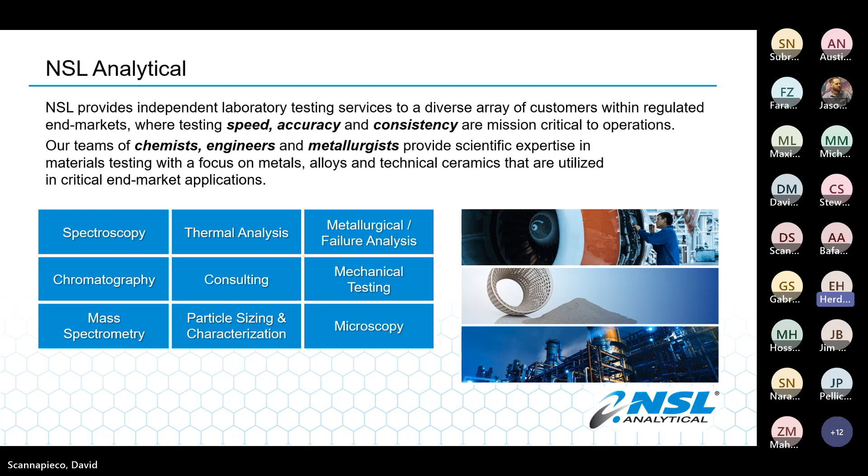A high-level outline: I'm going to kick us off by talking about Moore's Law, the exponential technology development curve Gordon Moore coined in 1965 for semiconductors, and draw analogies to our current state of development in metal additive manufacturing. Then I'll turn it over to David, who'll talk about the current state of industrial metal testing for additive manufacturing. Calvin will cover the third section on his research at Ohio State in the Materials at Extremes MatX lab. Then I'll close with an overview slide to seed discussion: what do we need to keep developing new materials for additive manufacturing?

Next slide, please. So again, I just have three slides here. I'll turn it over to David then.

I mentioned Moore's Law. This is the curve from Gordon Moore's original article published in 1965, cramming more components onto integrated circuits. Moore's Law says a doubling of the number of transistors every two years, so in powers of ten that's about a tenfold improvement every seven years. A lot of our modern life has been driven by Moore's Law.

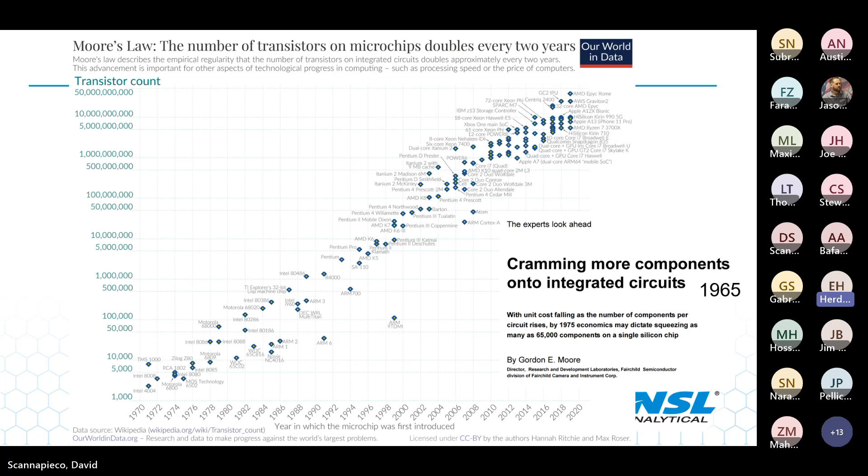There are a lot of different elements to this. I'll highlight three here and a fourth on the next slide. I think this is the foundation by which we're seeing new applications come out in metal printing, moving from prototyping to production. The first, an interesting corollary to Moore's Law, is that the cost of metal printing is coming way, way down. I've highlighted Xact Metal, a collaborator of mine for many years. Now they have, in this very cost-effective segment of laser powder bed fusion, a nice set of equipment they're selling that's in the low six figures—an interesting new dimension to the market that didn't exist previously.

Another development driving a lot of progress is advancing wire-based printing. I have an image there from Lincoln Electric Additive Solutions here in the greater Cleveland area. They're on the end of the spectrum in terms of very, very high productivity—measuring their productivity in pounds per hour, and their parts not just in centimeters, but in meters cubed. A really exciting entrant into the metal printing space.

And then another one would be binder jetting—so three different modalities here on this page. Binder jetting is really developing a niche on the metal side in high volume production because of its ability to scale with MIM processing. Next slide, please.

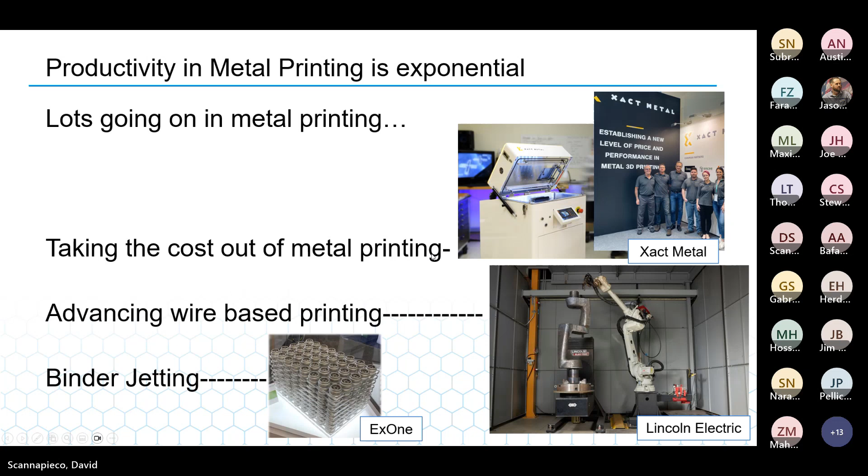What I did on this slide is chart, at a high level—happy to talk about more data offline—a snapshot historical view of productivity in centimeters cubed per hour for laser powder bed fusion of metals. What's really exciting about mapping this curve is that we, as a community, have gone through a 10,000-fold improvement over roughly 30 years. At least for this chart, and I think if we chart the cost and the productivity for wire-based and binder jetting as well, we are tracking Moore's Law for metal printing, which is really, really exciting.

I'll highlight here the three chapters I've broken out: the early metal printing feasibility era—low power lasers, low density, very low productivity, less than one centimeter cubed per hour, maybe just a few per day—up to the first laser powder bed machines that weren't doing fully dense metal. Then in 2004, fiber lasers came out, 200-watt fiber lasers integrated into these machines, and companies were first able to demonstrate fully dense metal with a single Gaussian laser. That was perfected, and there have been a lot of interesting developments and TRL/MRL maturation for parts. Then I have a demarcation line at about 2014, when a lot of the industrial multi-laser systems were introduced—that's the next star at 2014.

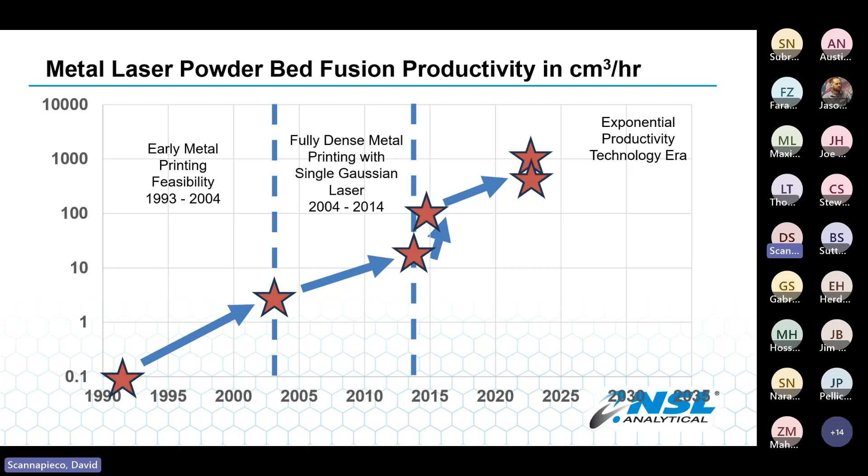Hi, my name is David Scannapieco. I am the Scientific Development Manager here at NSL. My expertise is in alloy development, so everything from atom to mechanical properties is what I study and where my interest lies.

When we look at additive manufacturing, there are quite a few unique situations and instances for this process that we need to characterize before we can get to a point of qualifying these for manufacturing, especially in the case of aerospace or space, where the needs are very precise.

NIST has identified three major challenges for approaching qualification of additive manufacturing. First is largely just the complexity of the parts, the freedom to design whatever we want in the additive space. It also introduces a challenge of how we can even test things like lattice structures, which you can see in the top right there, where the struts of that lattice are hundreds of microns, if that. Where can we get mechanical data that's reliable and can reproduce the performance of that part in its application?

Similarly, you get internal structures where you're going to get the as-built surface of additive manufacturing, which has a known severe impact on fatigue properties, stress rupture properties, etc. That's a major concern - how do we characterize those and approach qualifying them? Not to mention, reaching internal structures from an inspection point of view is a challenge.

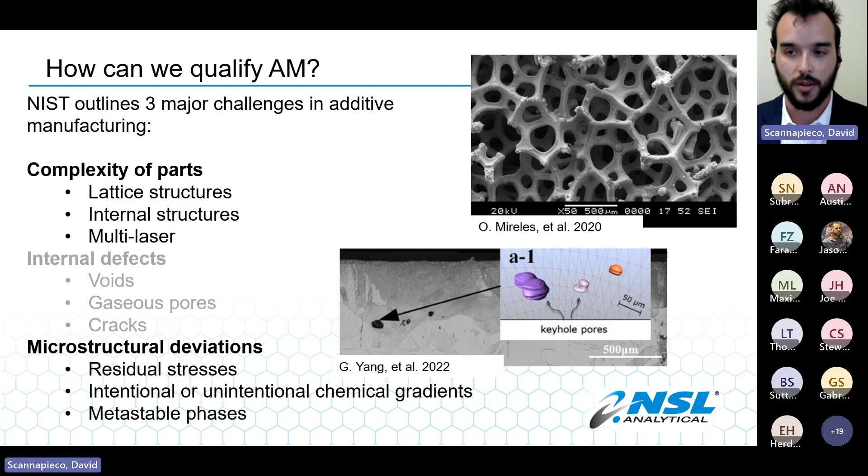So I'll step through a couple of solutions that exist in literature at the moment, but mostly this is to open up a conversation between testing labs, research groups, and manufacturers and industry, so that we can optimize the testing process to qualify AM parts. This is an ongoing conversation - there's no silver bullet here today.

But in some cases, we've found correlations between micro testing and typical ASTM standards. You can see great agreement in this miniature tensile test specimen here as compared to the round standard bar of 6 millimeters in diameter.

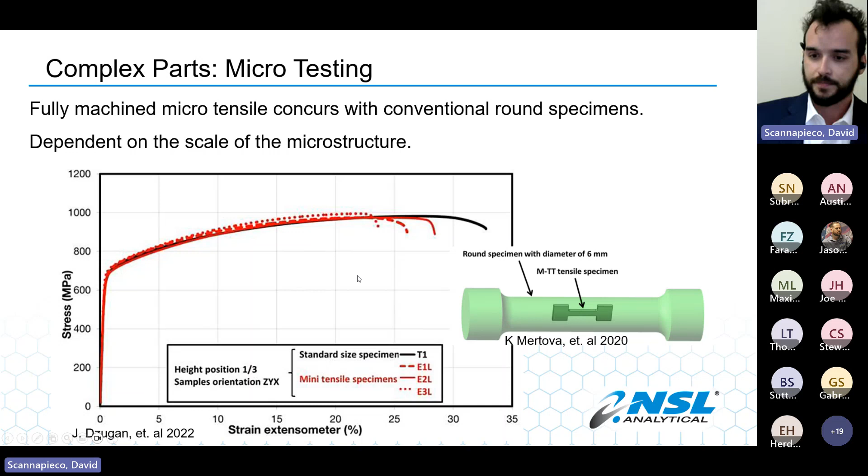And when we go forward with that, I can make this tiny specimen that I can carve out of a complex shape like this turbine in multiple different ways. We've got horizontal bars, vertical bars, coming right out of the fins, so we know the properties of the fins in the radial direction, which is exactly what the application is going to perform at.

And you can see, compared to two other literature sources that compare the Inconel 718 properties here, our miniature tensile specimens are performing on par, which is a great discovery, so we can look at complex shapes, but now we can test them even if they get very thin walled or very small component wise.

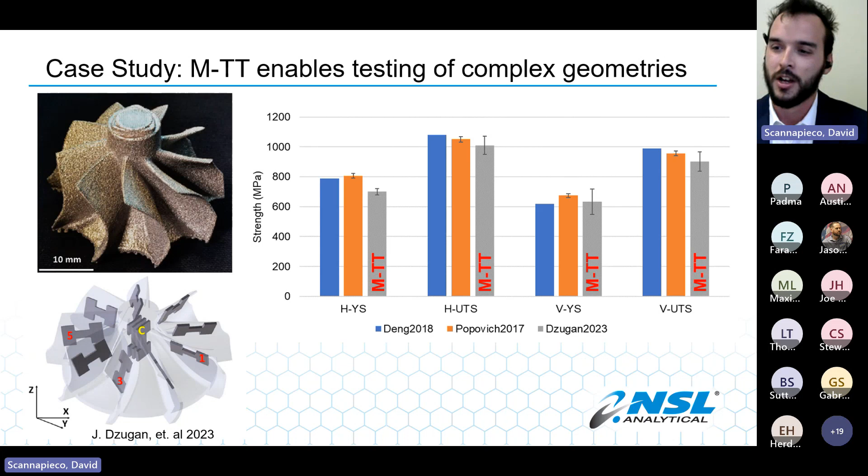When we look at getting into the microstructural deviations, I think the golden standard is always to go back to forging. You get a single heat of material, a largely homogeneous ingot of whatever material you're working with. It's forged and heat treated in groups together so that when you get to the end, the predictability between the microstructure of all those pieces is extremely accurate, extremely precise. So the testing requirements are not very severe, 1-2 components at most per batch, and that certifies tens to hundreds of parts depending on the quantity and the quality of the size.

So in additive manufacturing, how can we get to that level, and what are the challenges that we find when we're trying to approach this?

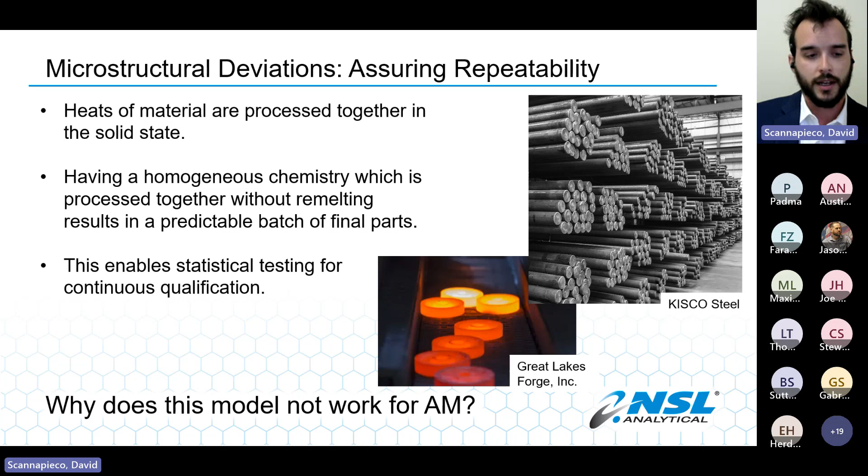So the key here, one of the major differences, is that obviously additive manufacturing is not a solid state process. In forging, you've cast your ingot of metal and then it never melts again until it's in application, and hopefully never melts in application either. But in additive manufacturing, we're remelting several times within the process.

And yes, we're working in an inert atmosphere, but even at 0.1% oxygen partial pressure in the chamber, which is where a lot of additive manufacturing machines will start printing at, you end up with oxides in the material because liquid metal loves oxygen. And even worse, in some cases, the unintentional chemical gradient, we superheat the metal, so it's not just getting it into a molten state, but superheating it, and in many cases vaporizing it. You see that on the inside of additive manufacturing machines, you get coats of whatever metal you're working with on an atomistic level, but it does exist.

And that can make some uncertain chemical changes from our powder stock to our final product. Understanding all of these changes and how adjustments of the additive manufacturing parameters play into these cases needs to be well understood. In addition, when you're building your component, your grain size changes from the bottom to the top of the build.

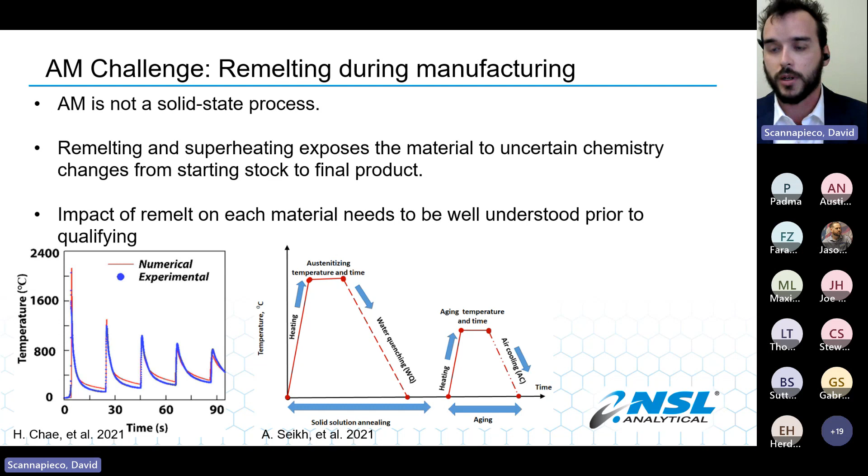Yep, and here we go. How do we test those batch sizes? Do we need witness samples in every single build, which is a practical approach to the task at hand?

But at the same time, if you're only building a handful of parts, depending on the size of the build and the size of the part and the optimization of the packing of those parts, you could be looking at several-fold increase in testing requirements to certify the same number of components as, again, the golden standard of forging.

And so somehow identifying where the critical points of failure in each build setup could help us reduce the amount of testing significantly, so that we can qualify these builds in a more effective manner.

It needs to be a conversation between test houses like NSL, research groups like Calvin Stewart at UTEP, and the manufacturers, to make sure that we're hitting everything we need to do to qualify these materials and advance out of the manufacturing into the industrial space.

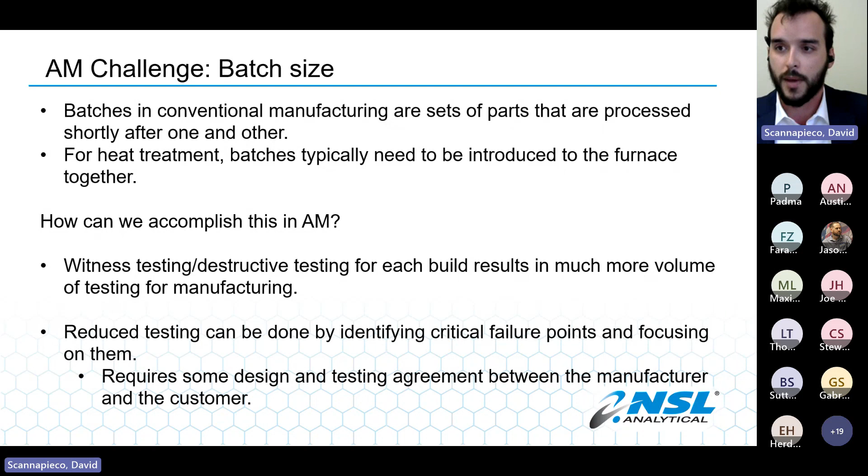And finally, one of the major differences for additive manufacturing is your feedstock characterization. You have powders, not ingots. Surface area is much higher, much easier to collect oxygen and expire the powder. It can go bad over time if it's not being used.

In addition, when you put the powder through a build, that chemical formula might change somewhat. And in those cases, we need to be able to certify that recycled powder is going to be as effective as virgin powder. So again, this is a question of do we need to chemical test after every build, or after every 5 builds or 10 builds?

And you can see where there's an exponential increase in chemical testing requirements, because not only do we have to certify batches coming out of powder manufacturers, but everyone in industry who's recycling powder is also sending for more chemical tests.

Every existing powder lot is getting chemical tested over and over again, and it's unwieldy if you just look 5 or 10 years into the future. So how these parameters all play together and what needs to be done in order to ensure that we're able to accurately make the parts that we need to is a major conversation that needs to occur and is occurring.

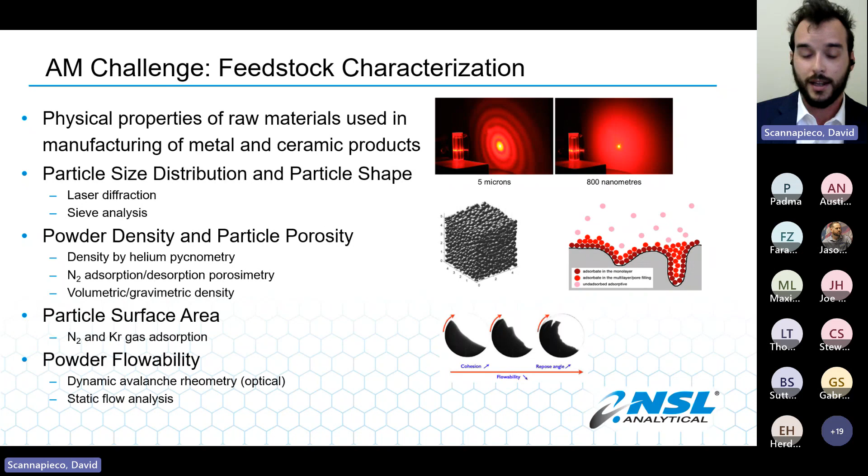So I talk about the importance of testing the chemical makeup of the powder to make sure that it can be reused in the right way. That's mostly because even trace impurities in powders can cause a significant change to the processing parameters.

So in this case, you have a 304 stainless steel, and with just an addition of 160 ppm of sulfur, you change the convexity of the liquid metal in the weld pool. That goes from being a deep penetrating weld, which is more ideal in an additive case, to a shallow wide weld, which reduces remelting and potentially prevents layers from fusing together. So now your powder might change how it's able to be processed without you changing parameters to compensate for it, and you end up with bad parts after some amount of time. Who knows how long it might take to absorb 160 ppm of sulfur.

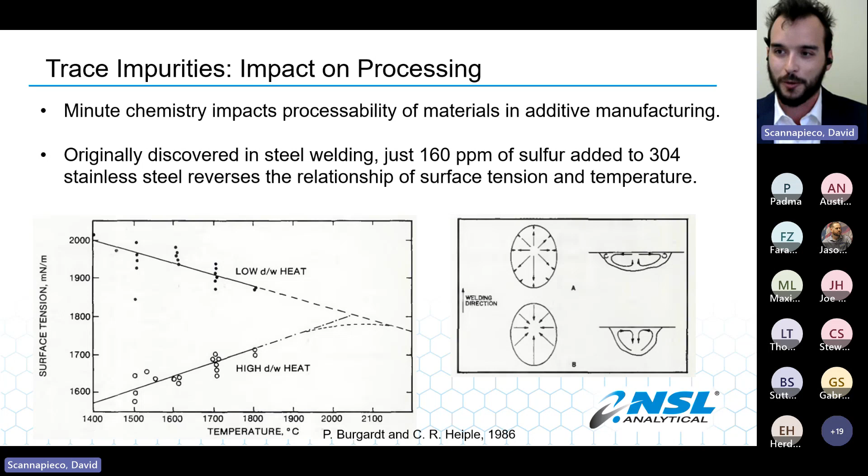Similarly, for one of the examples, GRCOP-84, which is a copper chrome niobium alloy, if it has just 200 ppm of iron, its conductivity reduces by 10%. This is for an alloy designed for its conductivity in combustion chambers, so this is a huge impact. So much so that NASA regulates that GRCOP has to have less than 60 ppm of iron in it, and you might think iron is not that hard of an impurity to get into your material.

A lot of our tooling, both in additive manufacturing and the powder industry, is made of steels, and so collecting just 200 ppm of iron is very easy to do. Verifying that our materials are consistently not having these impurities is critical for both the performance and the processing of additively manufactured components.

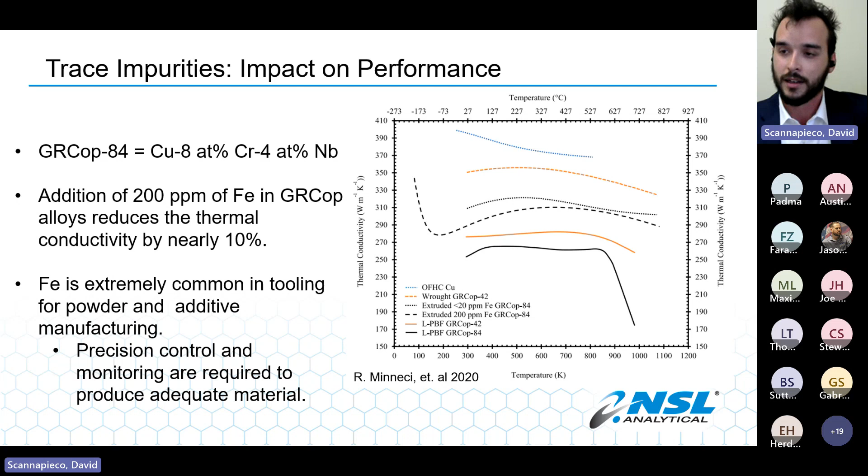So again, some things that we can do - NSL itself has the capabilities of going down to parts per billion if needed. In the parts per million range is much easier for us, but no doubt that we can detect these trace impurities. It's just how can we make sure that they're not coming in, and how much do we need to re-verify that they are or are not present.

In addition, we can combine analysis techniques such as using phase extractions and XRD to detect those trace impurities, but at a more reasonable level and with a better eye for detail.

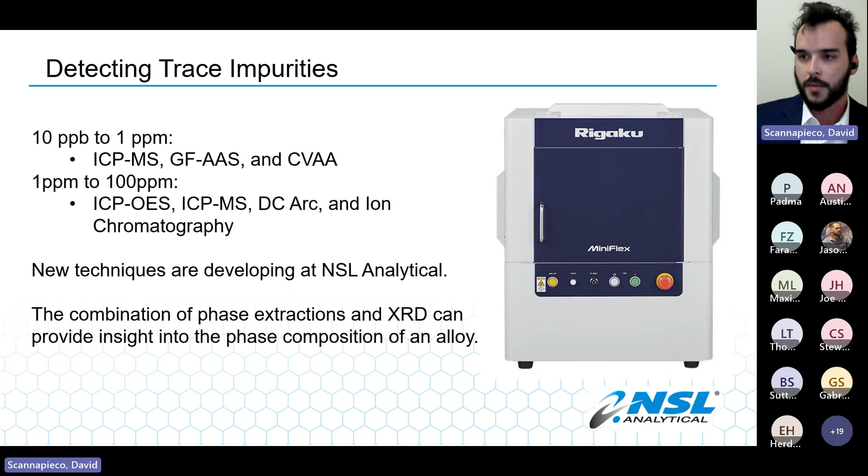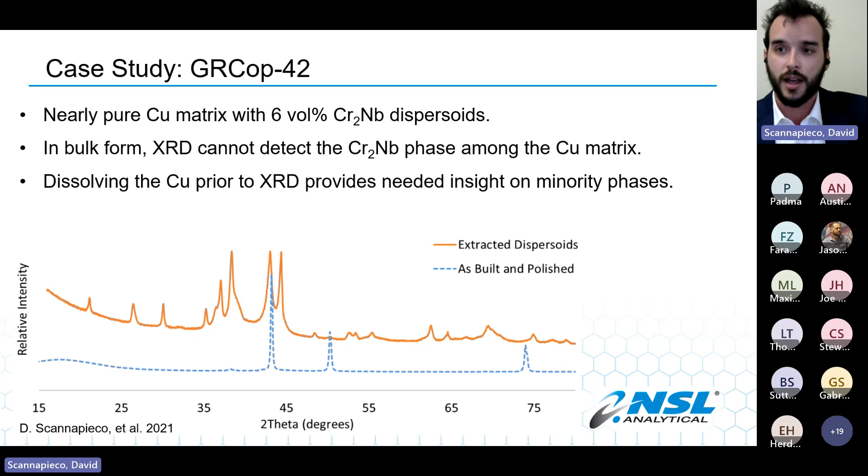And I think this is handing off to Calvin at this time.

All right, so to continue our conversation, let me introduce my research group, which is Materials at Extremes. We're a group that focuses on advanced manufacturing, developing advanced non-standard test methods and characterization techniques, as well as theoretical models to help us understand the mechanics of materials in extreme environments.

I've been at Ohio State for one year and have been building a lab, basically building a testing theater focused on non-standard tests for AM materials. Next slide.

So our group, in terms of advanced manufacturing, we're focusing on additive, collaborating with the Center for Design and Manufacturing Excellence at OSU, doing EBM, SLM, doing DED, basically exploring all of the different AM manufacturing techniques.

And then within my group, we do the advanced testing. So we've developed this incredible extreme testing lab that allows us to try to replicate the environment, service-like conditions within real parts, as well as helps us to accelerate the materials discovery process. And then with that testing data, we're able to create theoretical models, whether classical or using machine learning, to try to understand the behavior of materials and maybe even close the loop from process all the way to performance.

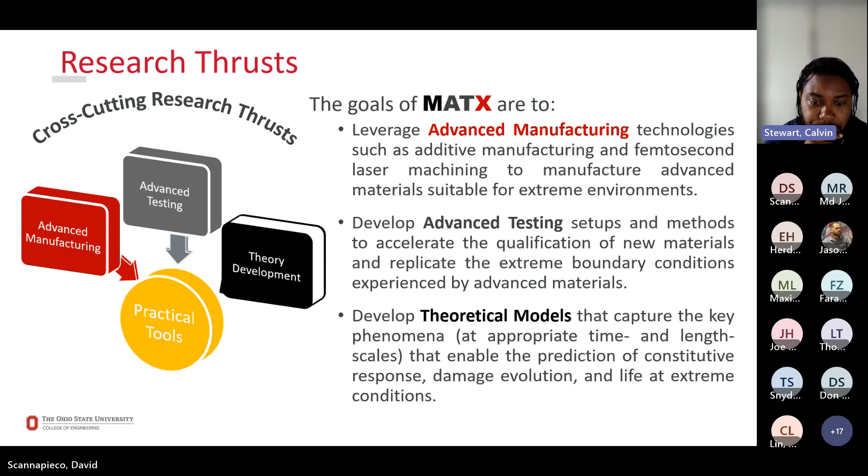So this is an image of the lab that I've been building. It's kind of like a testing theater. I've got it lit up nice, but it basically is a suite of mechanical test frames that are set up with different types of furnaces, so we can test materials at extreme temperatures.

We got a load capacity from 50 to 500 kilonewtons, so we can test a big steel beam if you want, or a small test sample. We've got different types of furnaces, from resistance heaters to induction heaters, that allow us to melt materials if we aren't careful, as well as we have some pretty high heating rates. And then we use things like high temperature digital image correlation to enable some of our non-standard tests.

So before I get into the tests, the future concepts I have for testing, I want to touch a little bit on the motivation for my research group.

One of the motivations is the Materials Genome Initiative. We see it almost every other week - there's a company that comes out with a new designer powder, or there's a new AM technique or technology that's been patented. And there's a need for developing the process to create parts using those new technologies, or there's a need to actually figure out the processing parameters for a new powder.

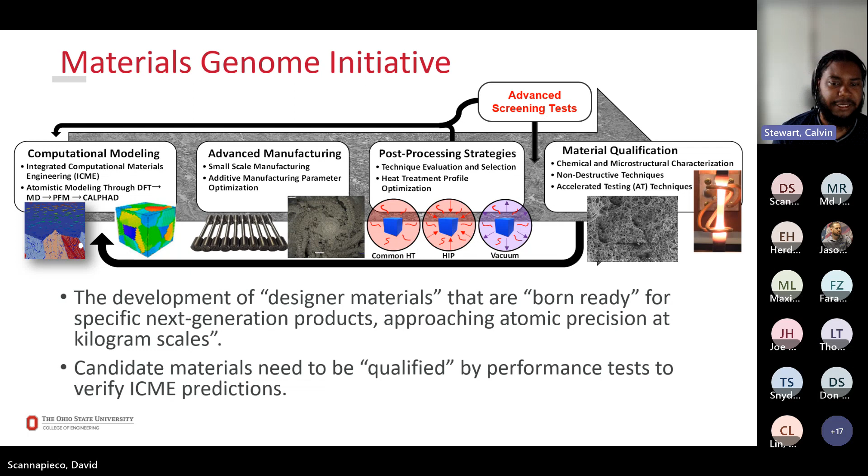Another main motivation in my group, and something that we're building demonstrators with, is this idea of multi-metal components. There's tons of advantage we know about additive in terms of complex geometries and unique features, internal cooling channels and such. But something that has really started to come online in the last few years is this idea of being able to print multiple different alloys in the same build process, or even in an interrupted fashion, so that you can create parts that have spatial material design, not just geometric design, but spatially designing and placing material where you need it.

So you can think of things like, well, we need a region that has high strength. There's a region that might need more crack initiation resistance, another region that might need more crack propagation resistance. There could be sections where we need tribology resistance, we need wear resistance. There's zones that need better heat transfer, or we want to save weight or costs. So something we're really interested in is this idea of gradient materials, or even materials that have kind of very defined boundaries that enable unique capabilities by material properties.

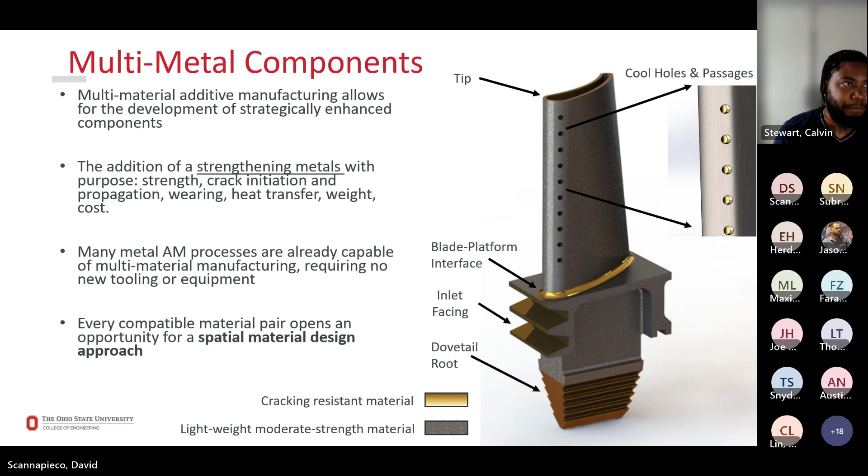Now, for testing, we tend to do the basic conventional testing when it comes to AM. We'll do hardness tests on a cube, we'll do tension tests on a sample, we'll try to optimize from there. But me, I come from the high temperature realm. Room temperature is nice, but I want to know how material is going to behave at elevated temperature. I want to do hot tension. I want to look at high temperature fatigue. And what my research group does a lot is high temperature creep of materials.

Parts that have to last for years - what is the creep resistance of those materials? And the problem is that the ASTM standard test is a real-time test. If you want to know 5 years of creep data, you got to do a 5-year-long creep test. And every sample that you print, that's one test. So the costs and the timeline for high temperature, long-lived AM components is extremely long.

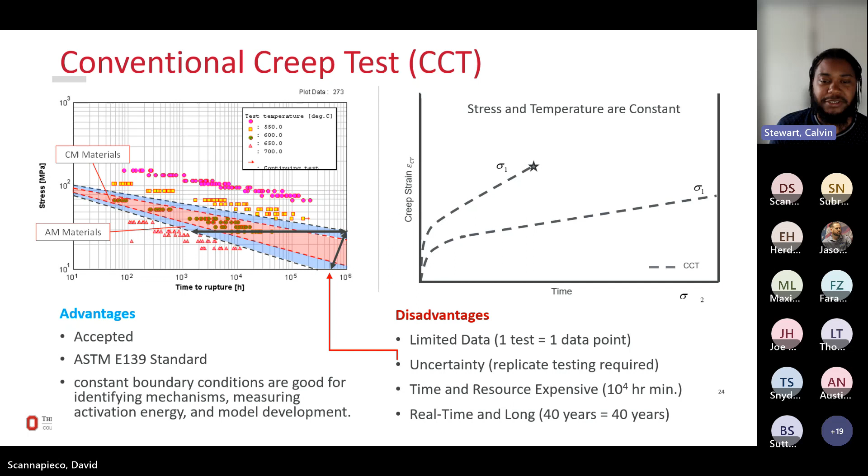Now, in the AM official NASA, ASTM, SAE qualification standards, there are three steps. There's installation qualification, where you install your machine and calibrate it, so it's qualified in place. Then operational qualification, where you load your powder and print probably six build plates of lines, cubes, and specimens to verify consistent properties with that powder on that specific machine. And then performance qualification, where you print parts, do NDE, and print witness samples.

This chain of qualification is extremely expensive and time consuming. And when we think about materials discovery, like the Materials Genome Initiative, we're trying to create new powders rapidly. It's really not feasible to use conventional tests that could take years, like creep tests, to understand material performance. So there's a need for new test standards and methods, things outside the box, so testing and qualification can keep pace with the AM technologies and materials coming out every week.

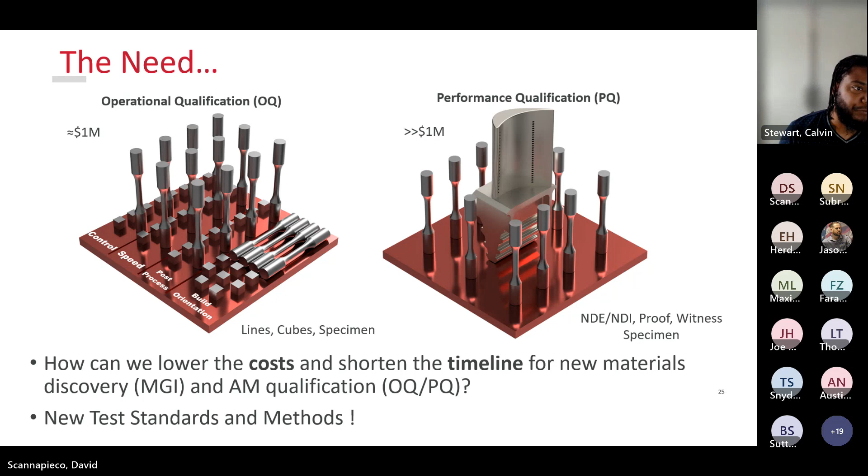So the future concepts I'm going to present today cover a couple of different areas. In my opinion, the future concepts are to develop rapid tests that accelerate our ability to get information in a shorter period of time, create tests that are parallelized, allowing us to get more than one data point per specimen per test, and finally tests that are miniaturized—how can we reduce the volume of material and powder we need to achieve operational or performance qualification.

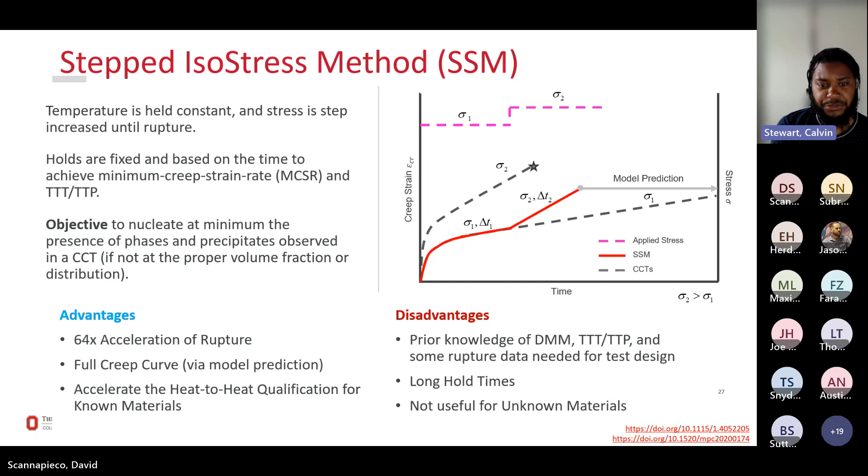So this is an example—a paper we published in ASTM's Materials Performance and Characterization journal, where we studied some wrought Inconel 718. We age hardened it, found the mechanism maps and precipitation maps for it, and targeted certain regions to design our test matrix.

Then we performed some of these SSM tests, dynamically increasing load over time—really short-term tests, less than 100 hours. Using our well-posed model, we were able to predict conventional creep curves out to over 1,000 hours, actually out to about 4,000 hours. This really saves a ton of time: tests of less than 100 hours get results out to 4,000 hours, compared to conventional creep tests. This was a really positive result for us.

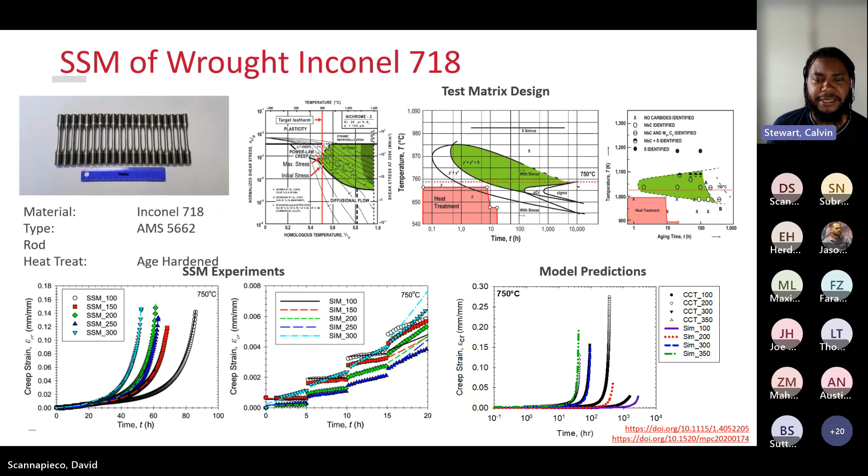From there, we thought, well, how can we speed this up? And how can we also use a process where we have a material that we don't have those mechanism maps for? What if we're making some new crazy powder where we don't have these maps? What kind of test could we use to make decisions about AM materials, new materials development?

For that, we developed the dynamic negative stepped test, where instead of stepping up the load and having these very fixed hold periods, we dynamically step down the load and we closely track and dynamically adjust these hold periods to keep the material on the edge of instability.

Basically, we create a test that tortures the material until it fails. And it tortures it across a number of mechanisms, different load levels that can transition through real mechanisms that can exist in that material. And from this torture test, it gives us a comparative ability between AM parts that may have different build orientations, process parameters, maybe different powder chemistry.

But what's also advantageous is that this test is even faster. This test accelerates at a higher rate. But the disadvantage is that we're not really nucleating phases that we would expect, because we don't know what phases might nucleate.

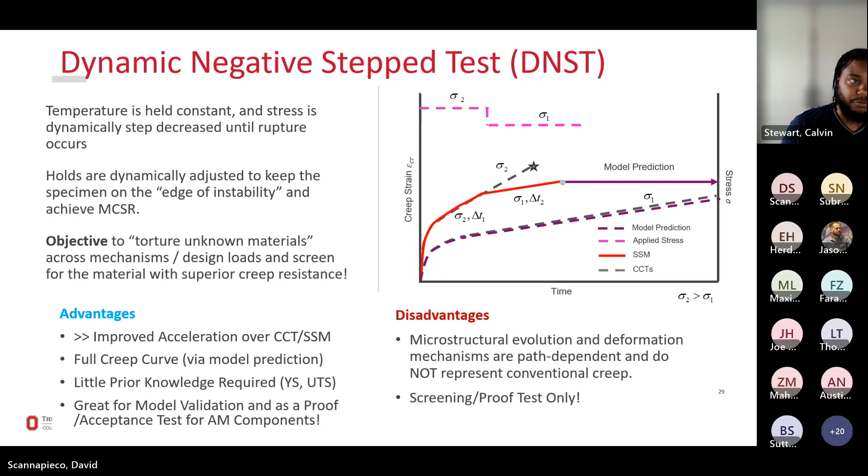So for this study, we went ahead and studied AM material, electron beam melted Ti-64. We did these DNST experiments, dynamically decreasing load, and we studied samples that were printed in different build orientations.

Analyzing the experiments, we came up with metrics, things like rupture time, minimum creep rate, ductility, as well as strain energy dissipation, an energy-based term, to make accept-reject decisions about which orientation is best. But also using well-posed models, we're able to predict the conventional response of any of these different build orientations.

So this is a very incredible tool in your wheelhouse. It allows you to screen a material based on processing parameters, and it allows you to kind of predict its full-scale performance in a really narrow period of time.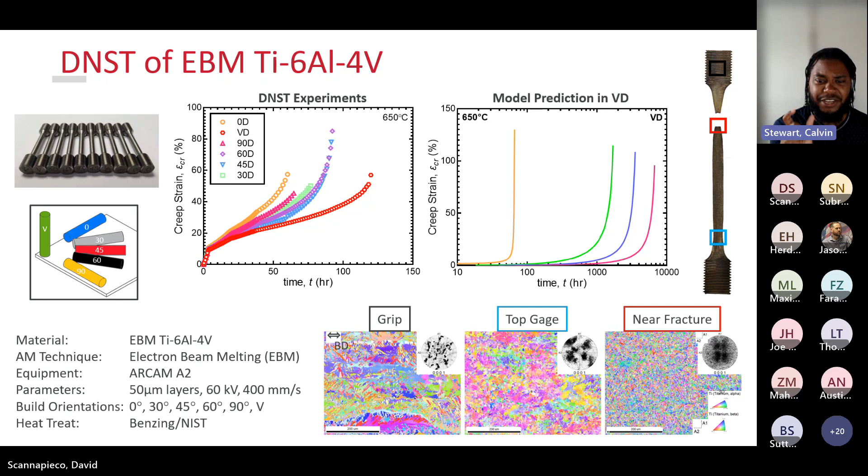So there are other things in rapid testing that we're also interested in doing, but now let's switch over to parallel. So we're going to go parallel, right? We got to have it parallel, and then we're going to test all at once. So we're going to move down and do these tests in parallel.

So another really interesting demonstrator that we are working on in my group is this idea of gradient boundary condition testing, to be able to test a material in parallel, to get more than one curve of data out of a single sample. Two concepts that we've proposed are this idea of the delta sigma and the delta T test.

In the delta sigma test, you have a geometry that's non-uniform, so that when you test that sample and you pick points along that geometry, each point has a different value of stress. If load is constant, as you change the cross-section, stress changes. And if you carefully contour that shape, you can minimize triaxial stresses that could develop, and you can also minimize how much stress concentration you have.

Now, if you use digital image correlation, which is able to track the strains on the surface of a part, then you're able to extract creep curves, an infinite number of creep curves along the profile of that sample. So from one sample, one test, you get an infinite number of tests, depending on how much focusing optics you have, depending on how much zoom you got on your camera.

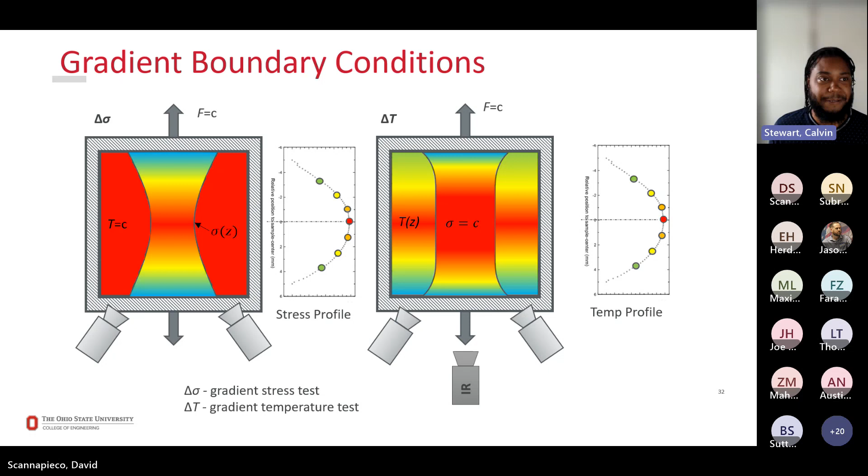So this is what you end up with. If you have a symmetric boundary condition, you can get replicate testing. So like sigma min, you see we have two curves there because there are two points at minimum stress.

And so from one sample, you literally get as many curves as you want. The dotted line means as many as you are able to get through your optics, as many individual strain gauges along that sample that you can pull.

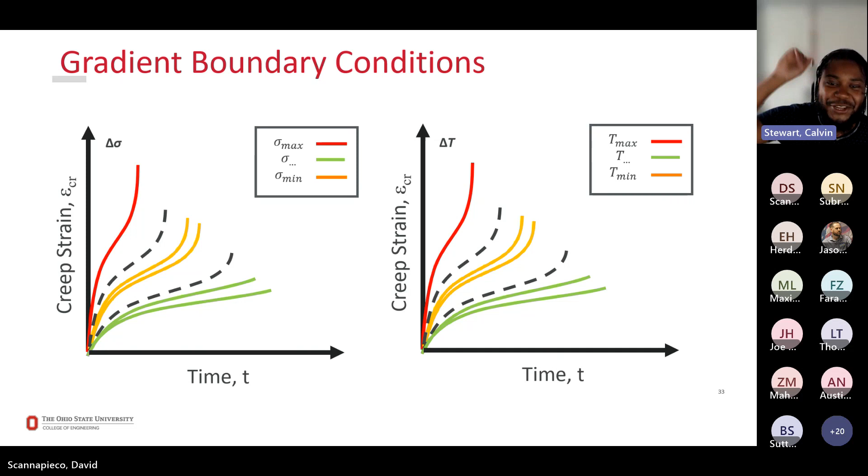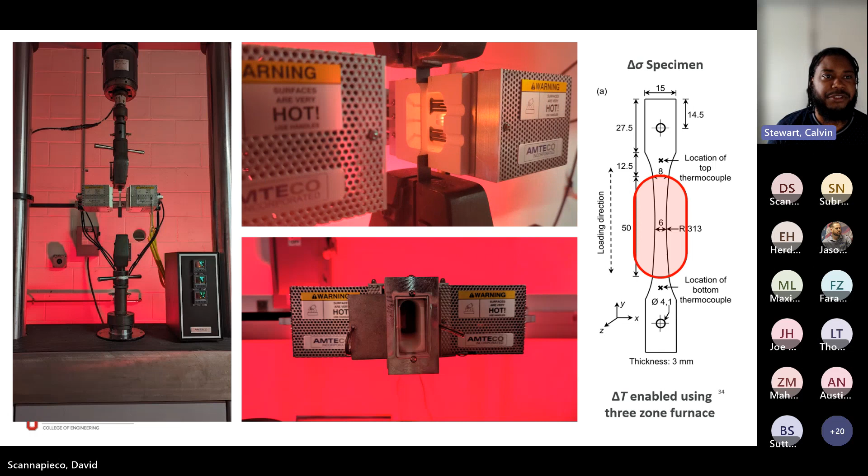So in this new lab that I'm building, we've been developing a test setup to do exactly these experiments. We've got an MTS machine here set up with a resistance furnace, a 3-zone resistance furnace, that goes up to 1400 degrees Celsius. We also have an optical viewport that allows us to actually see the sample when we're testing.

So we have a delta sigma specimen design that has a very slight radius along it that will give us a range of stresses of about 100 megapascals. It's kind of surprising. And then also, because our furnace is a 3-zone furnace, if we have a uniform sample, we can adjust the zones independently to create a temperature gradient.

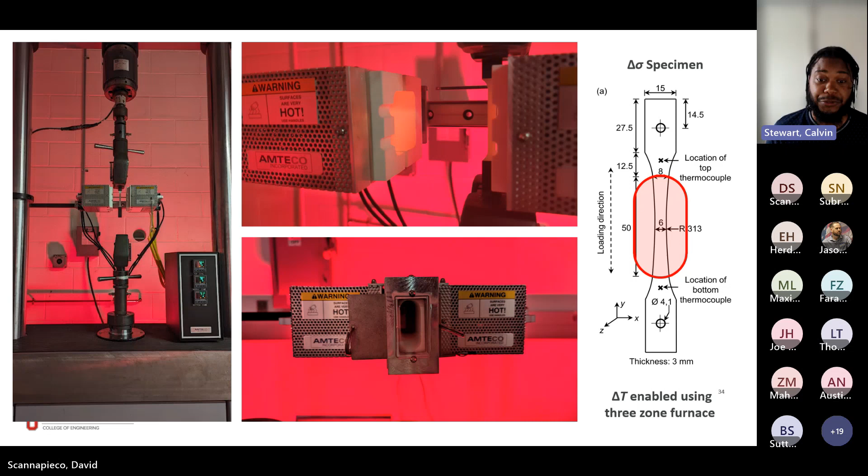Now, we could even take this a step further. Instead of doing delta sigma and delta T independently, we could combine those together, where we have a sample with a gradient shape and a gradient temperature field. That enables us to do tests that are more like service-like conditions, where depending on how we design these gradients, we can have a test with multiple worst-case scenarios for our actual performance part. And if we want to get even crazier, we can use rapid techniques, dynamically changing the force or load, or even dynamically adjusting the temperature field, moving it up or down, to accelerate the capture of data from these types of samples.

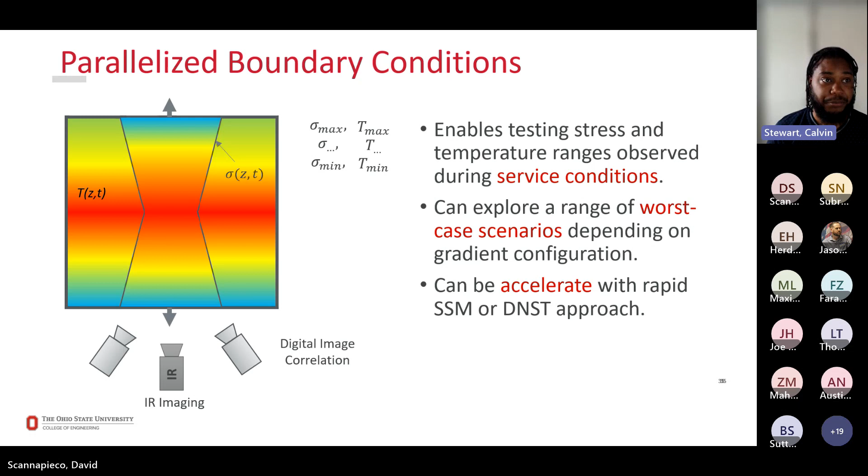Let's click, and then click one more.

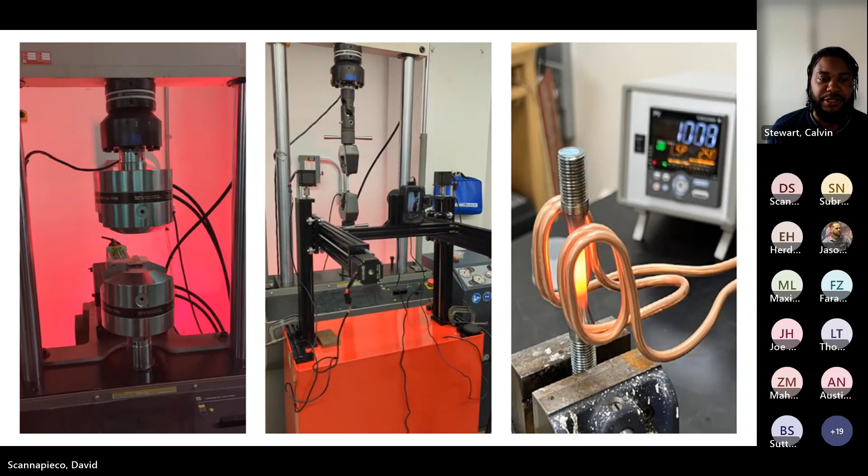Now, another concept we're working on—we're building a demonstrator with the CDME, the AM center here at OSU—is this idea of gradient materials. So instead of printing one sample of one processing parameter condition or one type of powder, what if instead we built, vertically up or along the build plate, a sample that has combinations of different powders or processing parameters or even build environments, and built up a single sample that has multiple distinct regions that we can study.

If we then take that sample and do DIC on it, with fiducial marks that tell us the different distinct regions, we can from a single sample extract information like the tensile properties or the modulus, or even creep curves—probably not fatigue, but at least creep properties—from multiple materials from a single sample. That could really be helpful in MGI, in new materials discovery, or in trying to finely tune process parameters for high temperature applications.

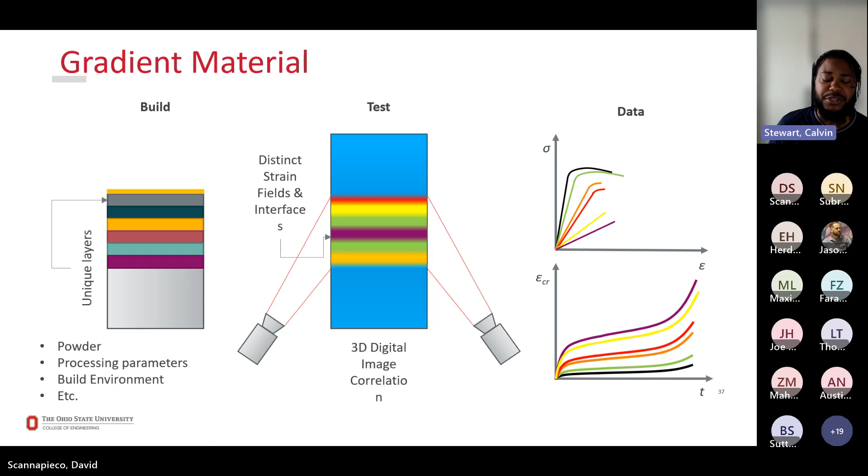Now, the final crazy idea is, what if we just wrap everything together? If we have a parallelized, multi-material, gradient material print, with a gradient temperature field and a non-uniform geometry giving us gradient stress—such a sample could be great for A-B material comparison, where maybe we have two candidate materials we want to put in service and we don't know which to go with. We could design this very specialized test to help us decide which material is best for our specific performance requirements. Next slide.

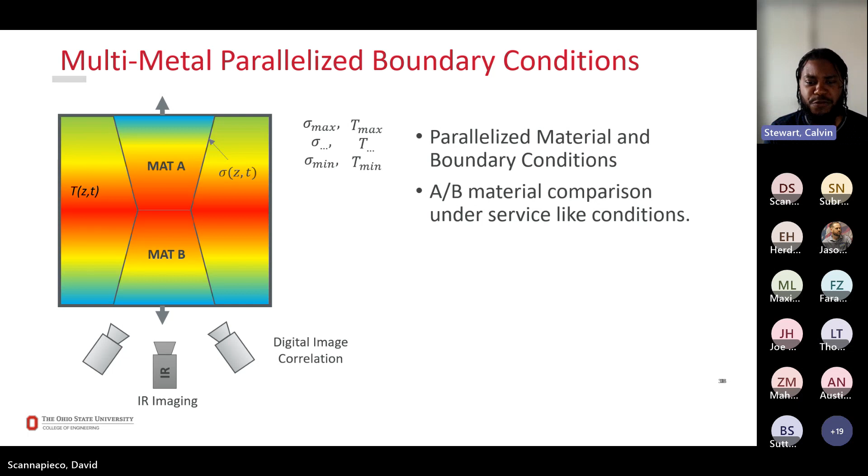And so finally, we move to miniature. Unfortunately, we don't have time to cover miniature, but there are a lot of things we can do in miniaturized testing that I'd love to talk with you offline. So that's all I got.